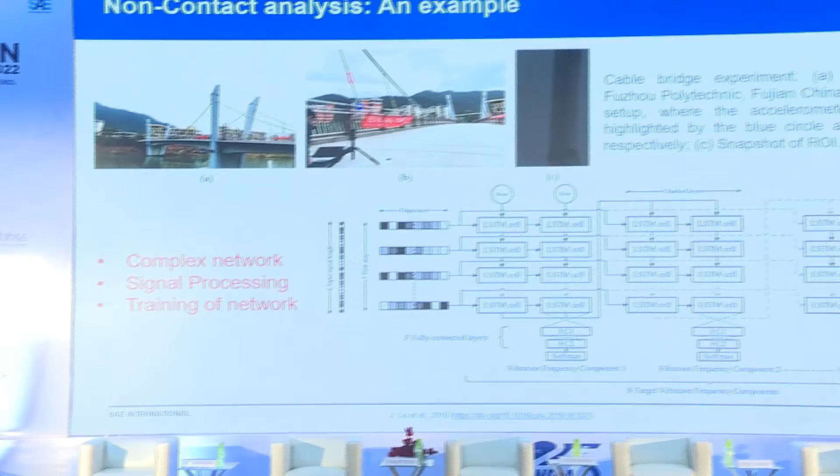They got the vibrations of the bridge, from the cable of the bridge. They got the results from the cameras only; a camera and a simple neural network they used to get the vibrations, the frequencies of the various frequency modes of the bridge. So what I am presenting in my workflow,

what I want is, if we can get the vibrations without using a microphone, why can't we get what people are speaking around the corner? Suppose there is no microphone, only we have the video available. If we are capturing some membrane, the vibrations in the membrane can give us an idea of what people are talking about around, without using any microphone in the area.

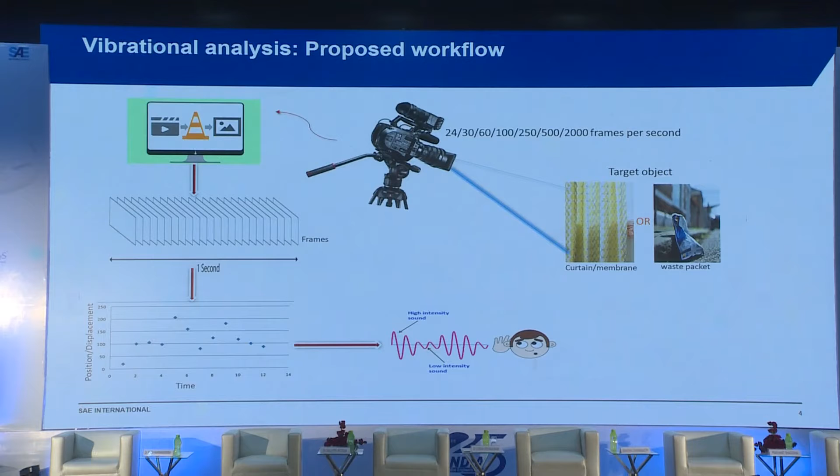So we will use a video. The proposed workflow says: from the video we will take the frames, then from the frames we will detect an object moving throughout the frames. Suppose we have collected around 4,000 or 5,000 frames from a video, and we are getting where the object was in every frame, and what the frequency was saying. From the object movement, we will read where the object is throughout the frames.

So I have used the Harris corner detection technique. This is a very basic computer vision technique. Simply, the input will be a video, and then we will extract the frames from the video. Then we will recognize the feature. The feature we recognize can be a corner, it can be an edge.

From that we will get a graph. It can be a displacement graph, it can be a velocity graph of the object throughout the video. Then we will perform the FFT to get the various modes of frequency of the object. Then we can get the frequency as an output. Here we are not using any costly laser vibrometer or any eddy current sensors.

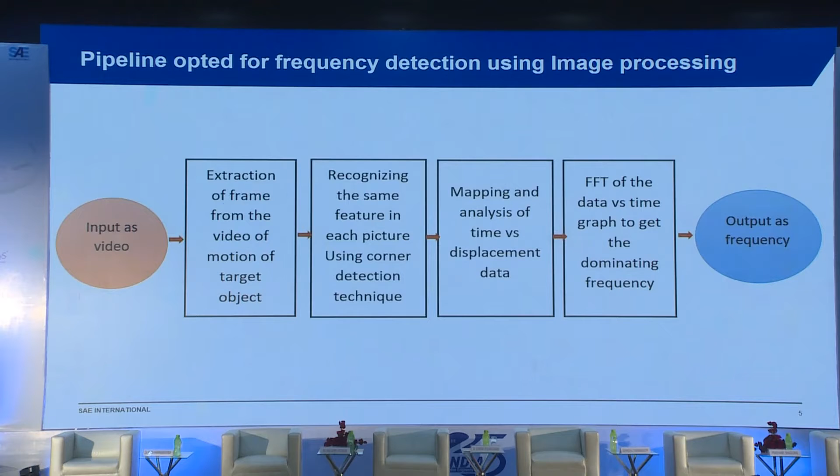So this is the experiment. I can show you here. There is a simple cantilever beam, and the frames are divided in this. So what is the natural frequency of the cantilever beam? It is 8.777. That's from the computer vision technique, and I have made the comparison of this.

This is the cantilever beam, which is fixed at one end and free at the other end. The movement of the free end has been captured throughout the video. You can see 1, 2, 3, 4 points. These are the captured points. Where was the object throughout the frames? Some of the frames I have shown here, and this is the FFT performed on that data.

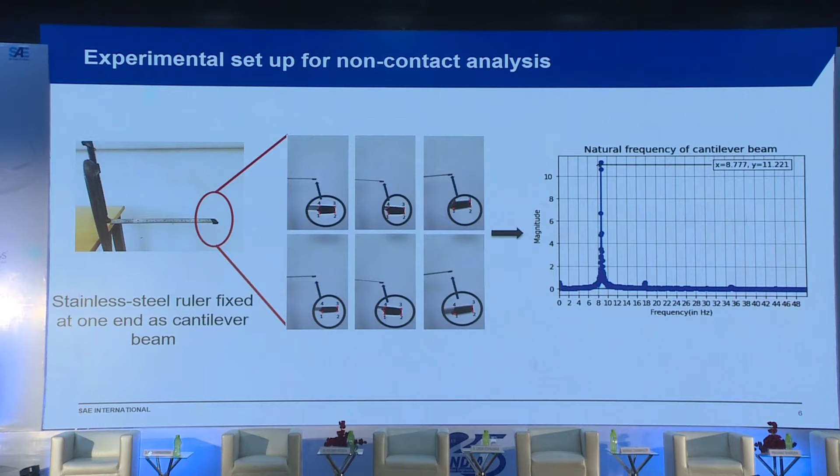Simply, what I did here is data mapping with the tape, pixel mapping, because we want the distance as an output. So displacement throughout the frames with respect to time; I have converted the pixels into displacements. Then the FFT has been performed on that data.

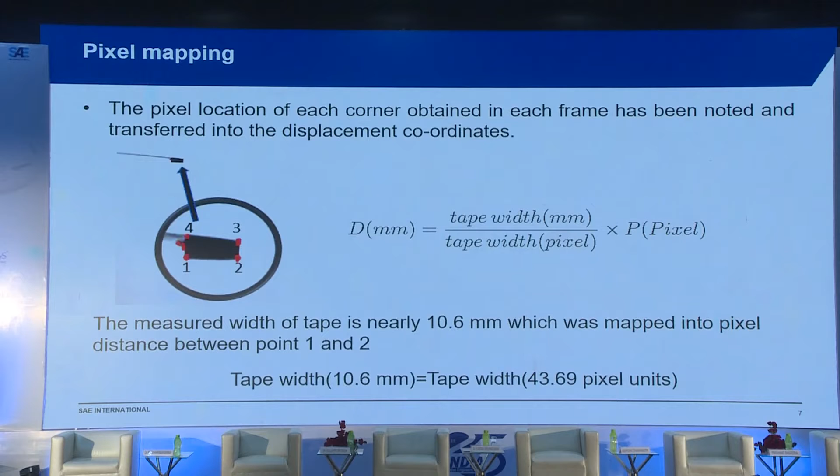So I will show you here, 10.6 mm. There is a simple tape available in the market. That simple tape was pasted at the corners, and the tape was 10.6 mm, and the tape width in pixel units was 43.69 pixel units. Then it was converted into mm. Then I got the displacement and time data.

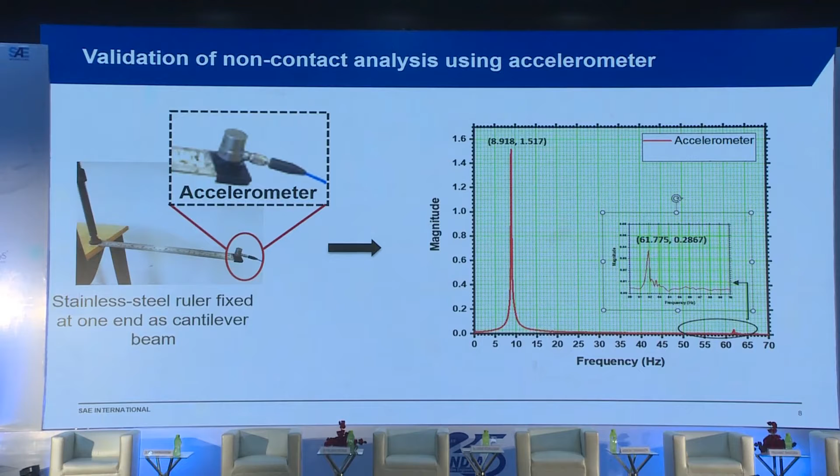Then the accelerometer. This is our conventional method to get the frequency of an object. The frequency observed using the accelerometer was 8.918, which is very close to the 8.77. So our experiment says that using the computer vision method we can get the vibrational frequency of an object, and this method has 98.4% accuracy.

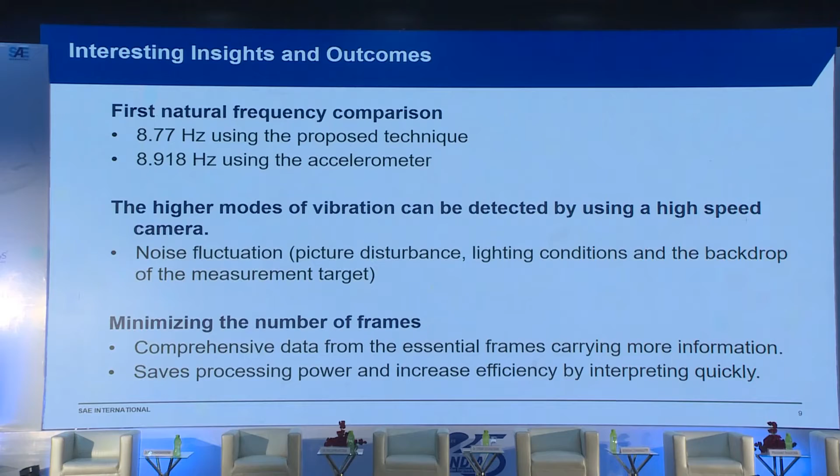What I observed is the first natural frequency using the proposed computer vision technique, 8.77, and 8.918 using the accelerometer. I got these results using only a mobile camera, a simple Samsung Galaxy mobile camera. As I told, there are infinite frequencies in a continuous object, so higher modes of vibration can be observed using a high speed camera.

If we use a high speed camera, we can get more than 2000 frames in a second. There are cameras where 20,000 frames can be extracted from a video in a second. As we are capturing the video using the mobile camera, there are various noises, and various problems like light intensity.

But using a high speed camera, if we are using a DC light, there will not be any fluctuation through the object in the video at the ROI. ROI means region of interest, where we are focusing the camera, where we want to get the frequency.

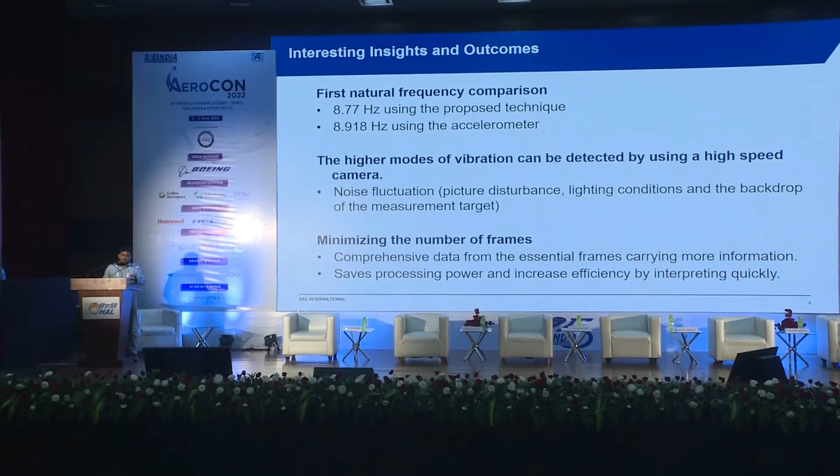So what is another insight I get? Like, comprehensive data: I got 5,000 frames in a second. Suppose there are 5,000 frames; I am not reducing the time, the time will be the same. So if I am reducing the number of frames, if I am taking every 10th or 20th frame, the amount of data can be reduced, and we can get the frequency in 2 to 3 seconds. We can get the frequency of a moving object.

And it saves power, and the efficiency means it can interpret quickly. Sorry.

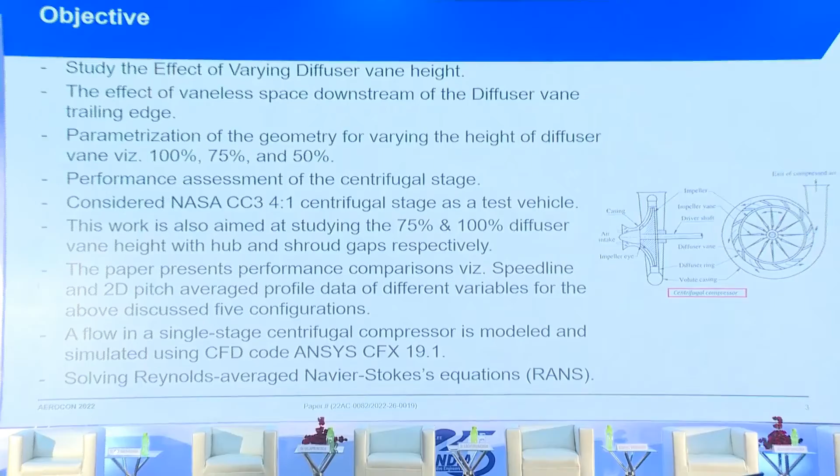So the objective of this study, in some points: first, we need to validate our CFD prediction with respect to the test data available in open source for the NASA CC3 impeller diffuser centrifugal stage. Second, once our prediction is validated with the test data, we performed some geometry changes, known as LSDV, low solidity diffuser vane, basically by changing the diffuser vane height to 50%, 75%, and 100% for the baseline case.

Then we performed a study by providing a gap between the end wall and the vanes: if there is a shroud gap, between the shroud and the vane, and if there is a hub gap, between the hub and the vane. So these four aims we have studied here.

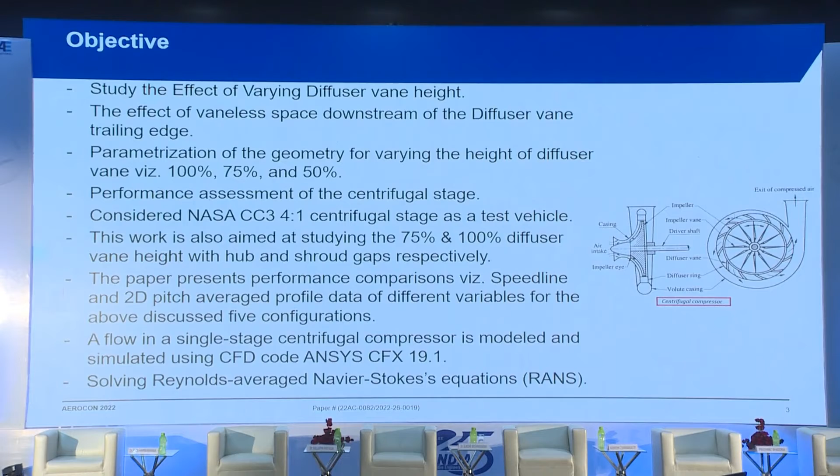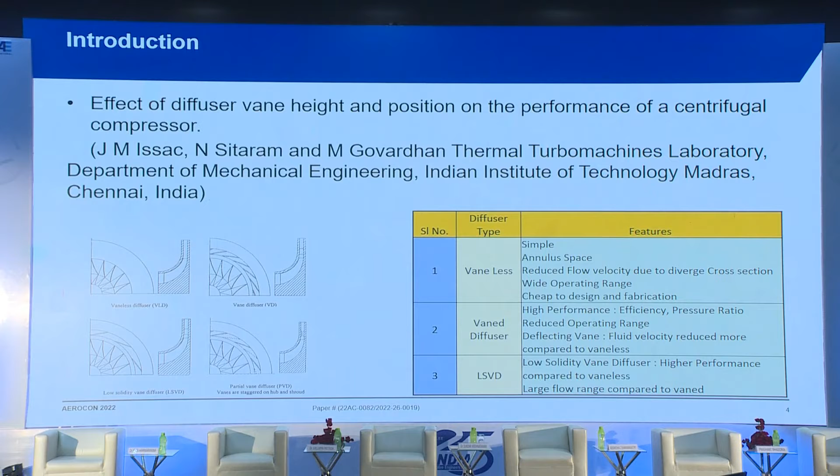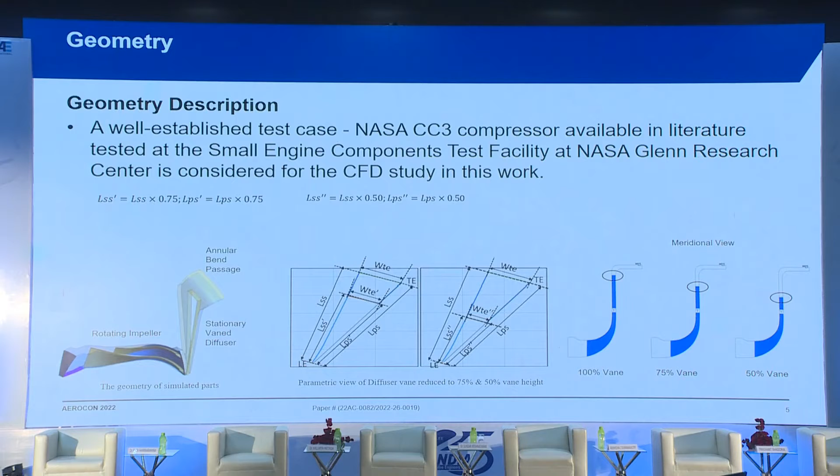So you can see the leading edge, trailing edge, wedge-shaped. Especially I will tell you that this is the wedge-shaped diffuser vane, not the airfoil vane. So the wedge-shaped diffuser vane we have used in this study. You can see in the right corner how we have changed the diffuser vane height. The baseline is 100%, then 75%, then 50%. That meridional view you can see easily.

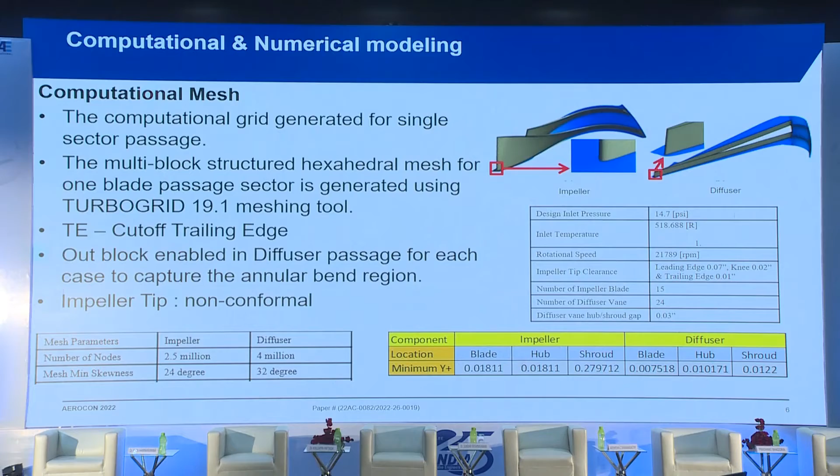The view of the mesh, you can see this is a fully hexahedral case, and the first cell height, as per our CFD standard, our Y plus values are also as per our CFD standard. For different end walls, like impeller blade, hub, shroud, we have tabulated how many component nodes we have used for this CFD study.

So you can easily see the 2.5 million for the impeller and the 4 million for the diffuser. It's 2 million for the diffuser vane, but there is an annular passage outside of the diffuser, which is a full passage up to, we can say, the combustion chamber, with another 2 million of mesh, so that is the 4 million. So right now it is 4 million.

And for the impeller tip clearance methodology, we have used a non-conformal mesh tip. And the O-block we have enabled in the diffuser passage to catch the flow in the bend annular section.

So I think I have missed something. Yeah, here is the operating range. You can see the design inlet pressure, it's already available in the open sources. So we have used this sea level condition for our prediction, that is inlet pressure, inlet temperature, rotational speed.

For the rotating component, impeller tip clearance, we have not used a nominal tip clearance, which is constant from leading edge to trailing edge. We have used a variable tip clearance, which is different at the leading edge, different at mid span, and at the trailing edge side.

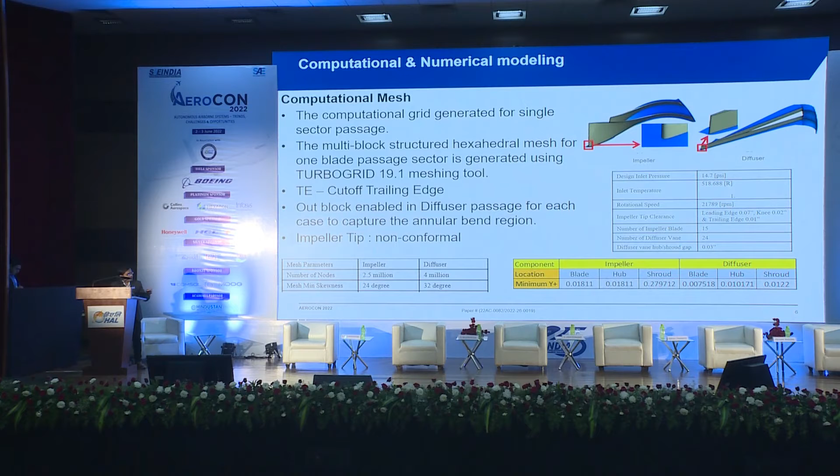So the number of passages for each component is already available here, and the diffuser hub gap and shroud gap we have introduced as 0.03, which was not available. So for this hub gap and shroud gap study, we have used this gap.

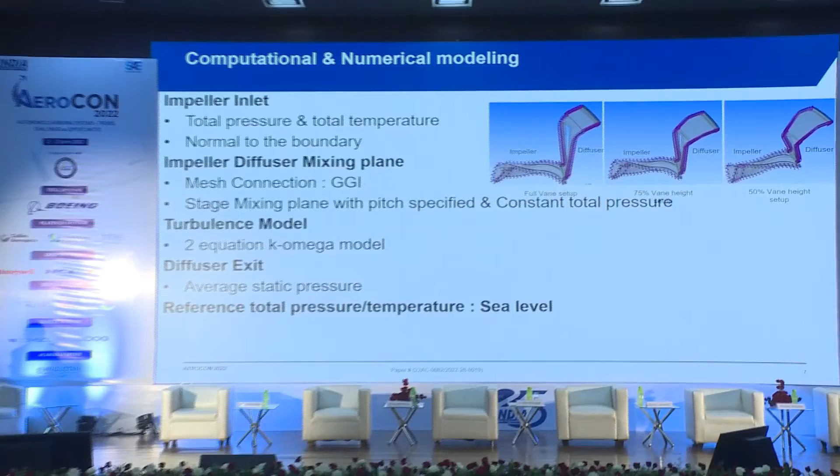So now come to the CFX modeling. We have used ANSYS CFX 19.1 to prepare our CFD model. So you can see the baseline and the diffuser with 75% and 50%. We have used total pressure, total temperature as the inlet condition, and the flow direction is normal to the boundary. Then the mesh connection at the diffuser mixing plane.

This mixing plane is very important in this study because the flow is coming out from the rotating component and going inside the diffuser, the stationary component. To match that flow, we have used a stage mixing plane average scheme available in the CFX model. It averages the flow or flux on the side of the interface towards the rotating component, and that averaged flux goes inside the diffuser vane, or the stationary domain.

The turbulence model is also one of the main concerns. What turbulence model can we use for our CFD prediction? We have used two-equation models, based on K omega and K epsilon. The impeller has different characteristics because it is rotating, and the diffuser is different because it is a stationary domain. So two-equation models like SST, shear stress transport, or the baseline turbulence model we have used to capture boundary layer separation.

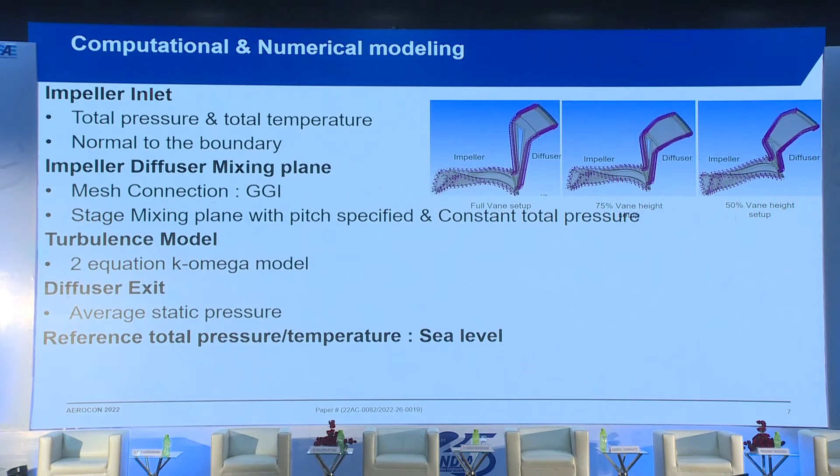And for the diffuser exit pressure we have used the average static pressure. And our reference total pressure and total temperature are at sea level only.

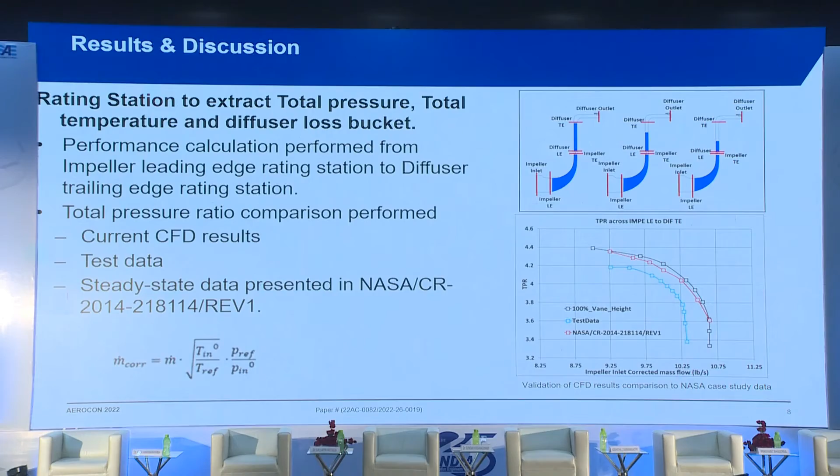With this confidence, we went ahead and predicted our CFD performance curve, the performance characteristics for the diffuser for the LSDV, basically the impeller diffuser stage: baseline, then 50%, 75%. So our CFD modeling is showing us that yes, the total pressure ratio for the 75% vane height is higher compared to the 100% vane height diffuser vane.

Usually the aero designer looks at the compressor: if it is giving us higher pressure ratio with low temperature, based on that we will get higher efficiency. So with the same mass flow rate, if we get a higher pressure ratio, that compressor is acceptable as per the industry. Compressor performance is also directly related to specific fuel consumption. If compressor efficiency is higher by 1%, then SFC is going to reduce by 1%.

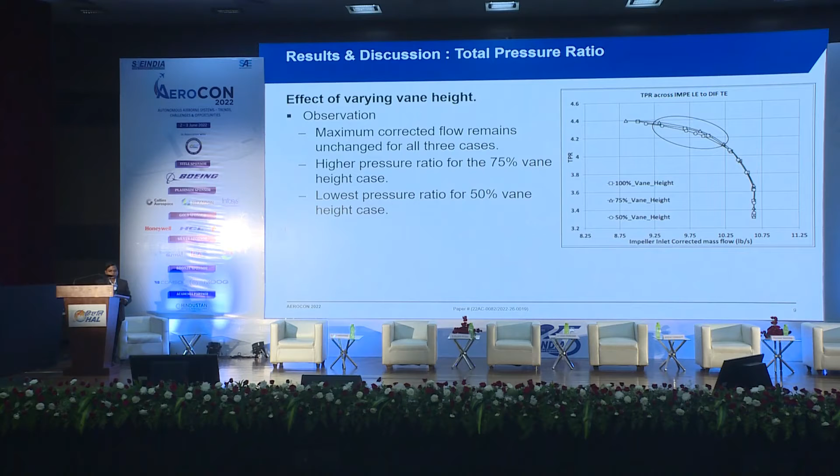So the aero designers are mostly interested in the high pressure ratio compressor, which will provide high efficiency to get reduced specific fuel consumption. Here you can see the total pressure ratio, and next is the efficiency. The efficiency for the 75% vane height is much higher compared to the baseline and 50%. How it can happen, that also we studied. It might be a separation loss, a pressure loss in the diffuser vane, or a shock loss.

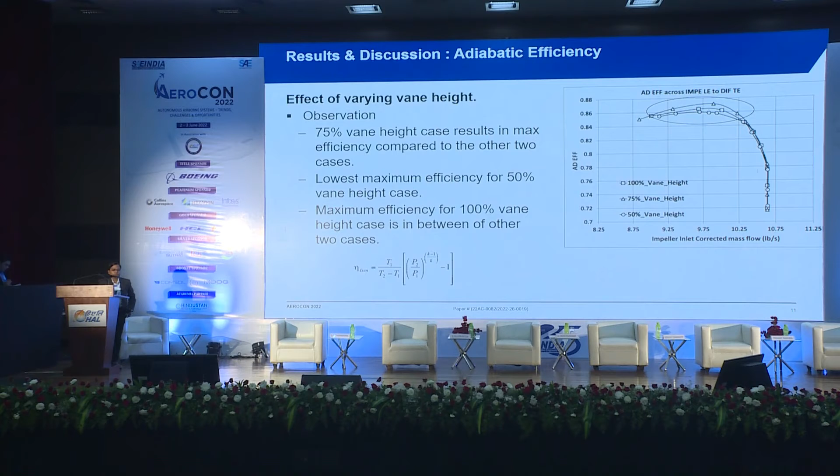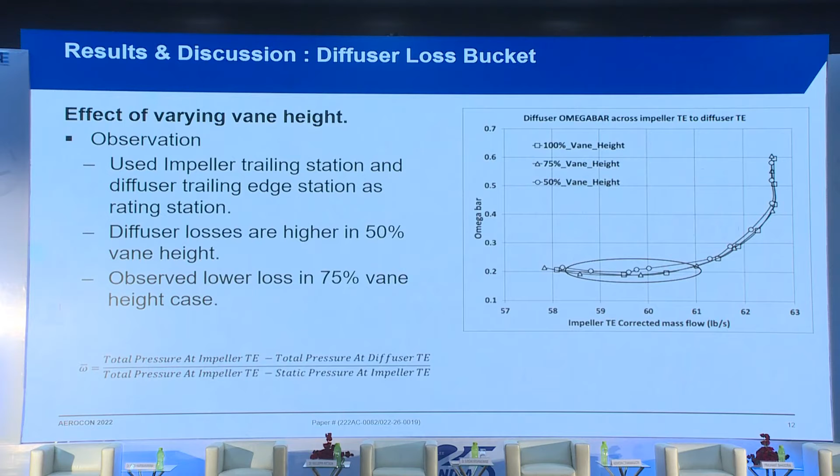You can also see the operating range: the stall point towards the left side, a lower mass flow rate, we have gained compared to the baseline and 50% simulation. Here you can also see the diffuser loss, basically why we have received higher efficiency in the 75%. We are getting lower loss in the 75% vane because of separation, which we have shown in the next slide. So lower loss we have predicted for this 75%, and that's why it is showing higher efficiency.

Now come to the flow characteristics, the flow field. We took the max efficiency point in each case, baseline, 50% and 75%, basically at a constant mass flow rate, and introduced span-wise calculation. Span-wise turbo surfaces means planes at 10%, 50% and 90%. 10% span is near the hub, 50% is mid span, and 90% near the shroud. You can see the total pressure in the 100% and the 75% vane height.

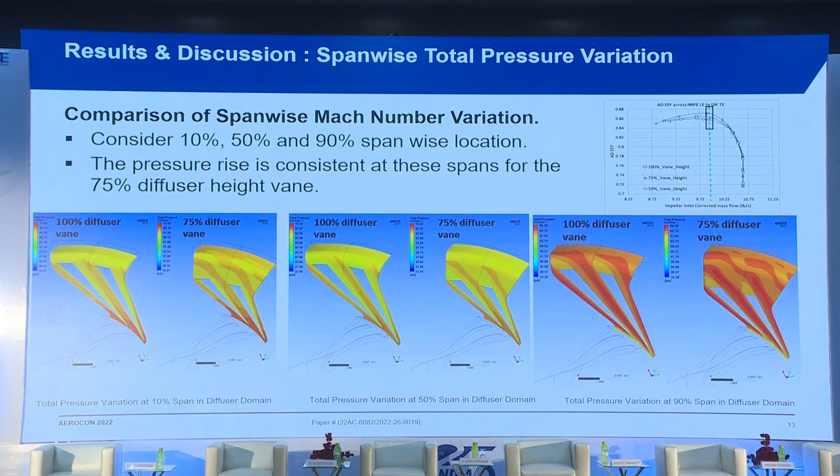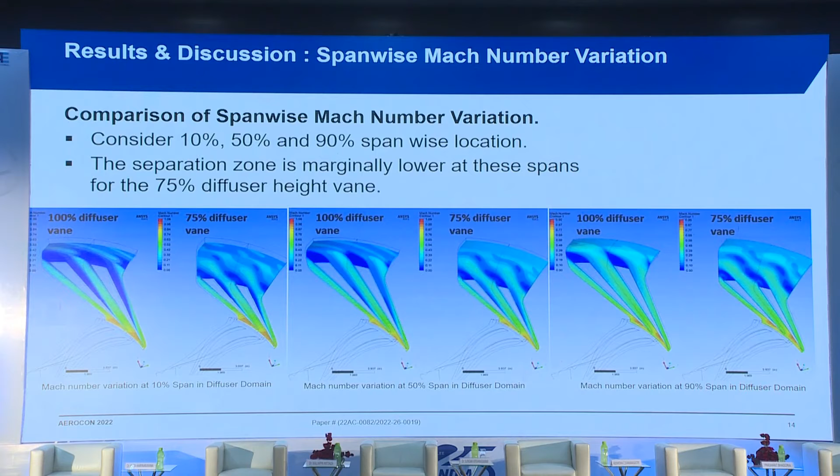The total pressure on the left side at 10% span, 50% span and 90% span is varying, and higher total pressure we are getting for the 75%. Here is the Mach number. Where we get a lower Mach number, there is low velocity, meaning flow separation and separation loss. The case with a higher separation zone has low efficiency. At 10%, 50%, 90% span, our 75% diffuser vane provides a low separation zone, so our flow is more aligned and streamlined compared to the others.

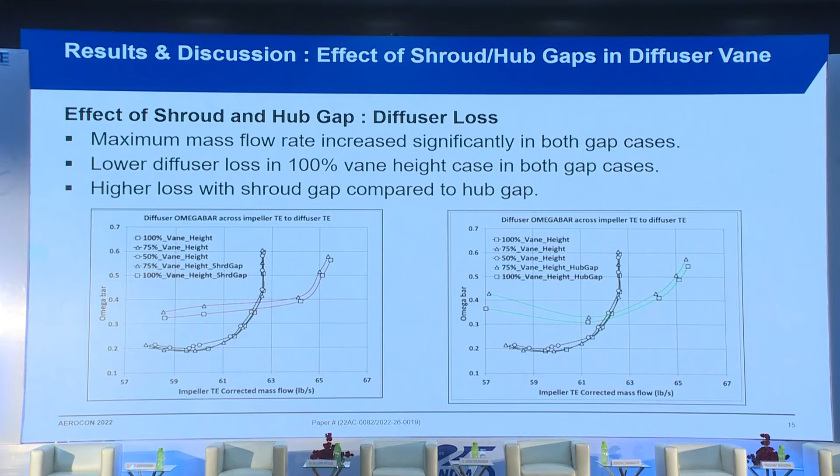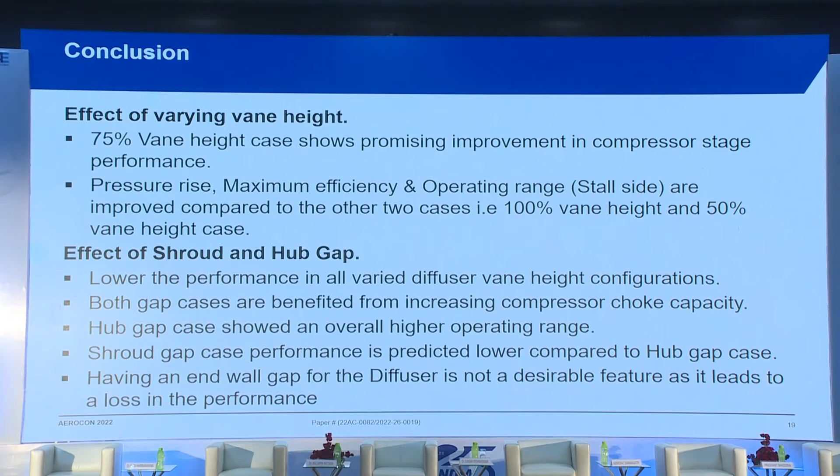Thank you, Sailesh. Do we have any question? Anything?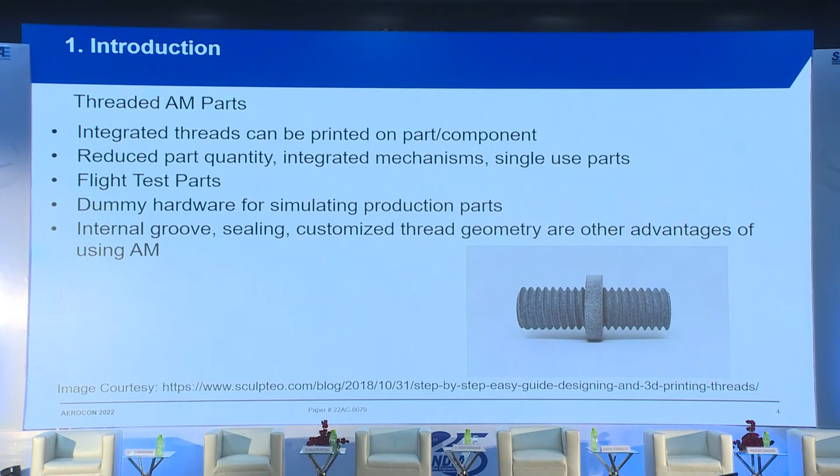Integrated threads can be printed along with the part, because conventionally we make the fastener first, then go for thread rolling as a separate operation. This gives reduced part quantity, integrated mechanisms, including cases where we need single-use parts, where 3D printing becomes handy. Flight test parts, dummy hardware for simulating production parts, prototyping or proof of concept, or MVP as we call it, minimum viable product - in such scenarios 3D printing is very handy. Internal grooves, sealing, customized thread geometry are other advantages of using AM, since we need not go for a secondary operation of thread rolling or machining. We can realize these things at one time using 3D printing.

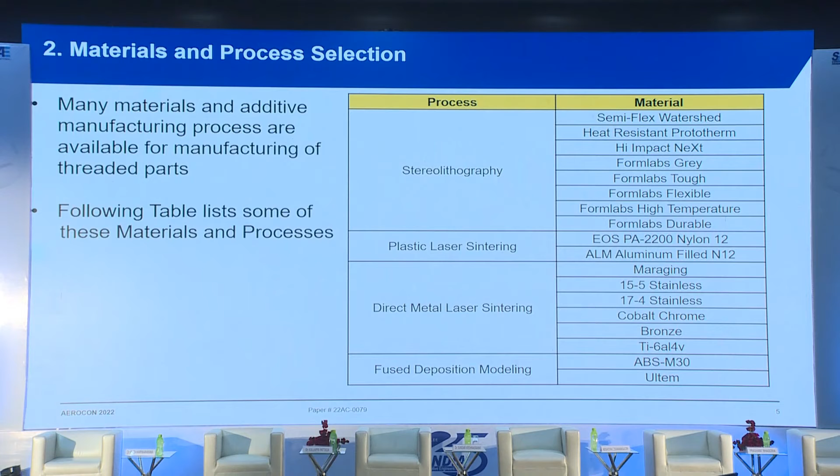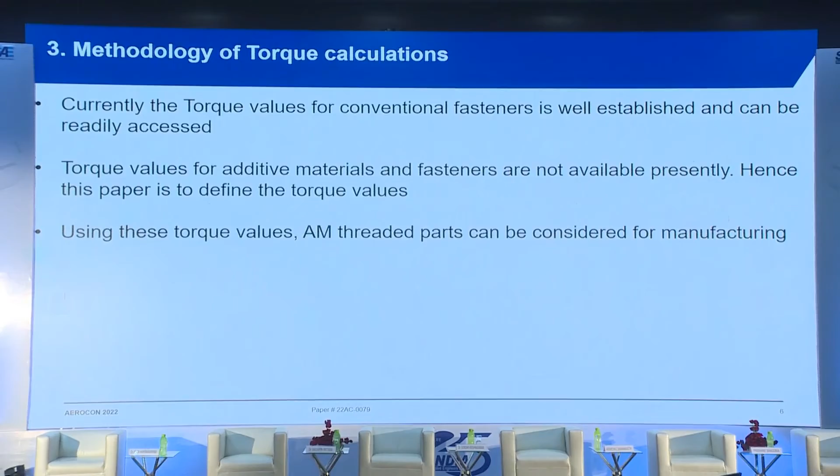Just to set the context as to why we stumbled upon this opportunity for exploring torque calculations for AM parts: as Dr. Kishora mentioned, there was a patented part which was printed and available to us, but I did not find any application of it on flight test. When I inquired with our airplane leads, they said we cannot fix it onto the aircraft for flight testing simply because we don't have a torque calculation available for it, or a preset torque value for AM threads. So we cannot justify fixing it onto the airplane.

At that time, I realized this is a crucial area we have to focus on and build upon, so that for threaded parts of AM we can establish torque values, similar to how we have quite an exhaustive list of torque calculations for conventional fasteners.

Coming to the methodology of torque calculations, for conventional fasteners we have quite an exhaustive way of describing it. In this paper, we tried to use the same approach of calculating torque, the formula basically, but using the allowables available for AM. Since we don't have certain factors like thread coefficient, we assumed present values for the actual material and used the same in the calculation. Going forward, with experimental validation, we should be able to derive those coefficient factors as well.

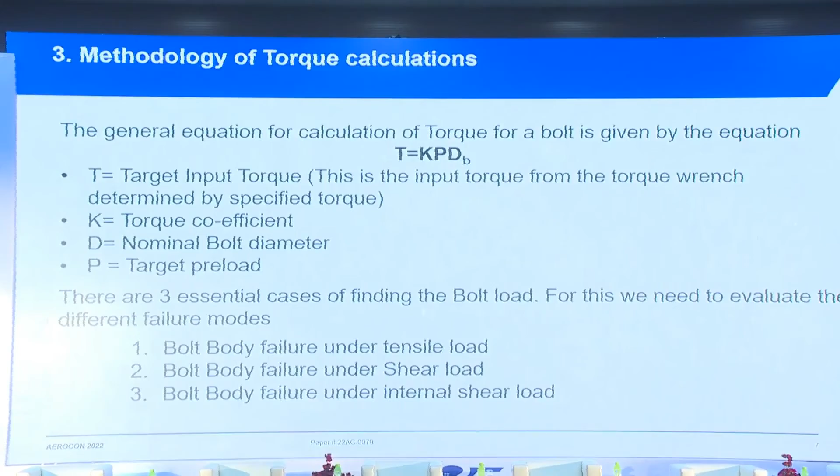This is a very simple, well-established torque calculation methodology. Target input torque is what we want to apply as a pre-torque load onto the clamp or fastener. We have torque coefficient K, nominal bolt diameter Db, and target preload.

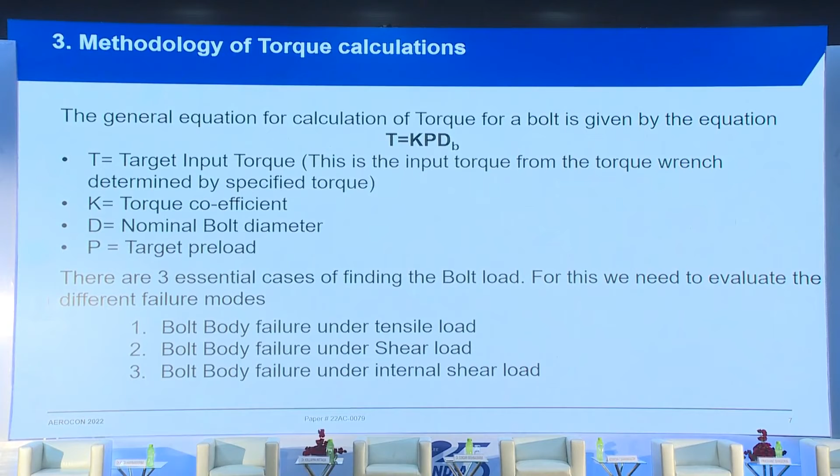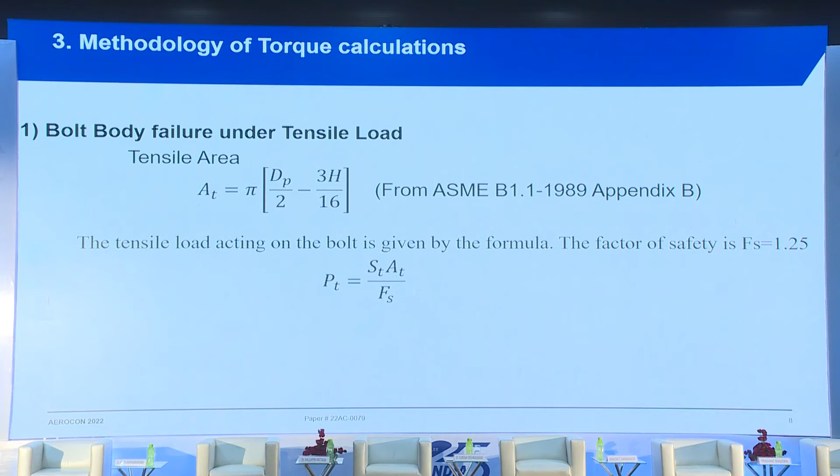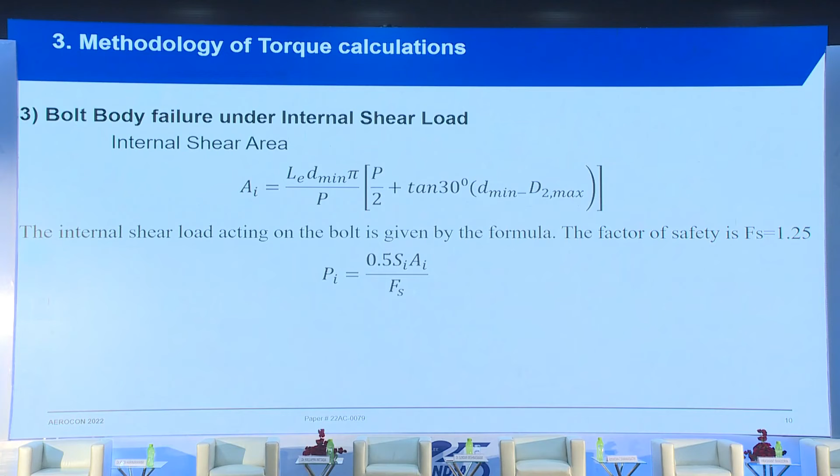This is basically done considering three different types of bolt body failure: tensile load, shear load, and internal thread shear load. These are all from the ASME standard, a regular formula which we've used, so I won't delve into it much. For example, the tensile load for the first condition is obtained by this formula, giving a pre-torque load value. We do the same for shear load and internal shear load, finding all three cases. The minimum of the three is the worst case scenario, which we take into consideration for finally calculating the torque values.

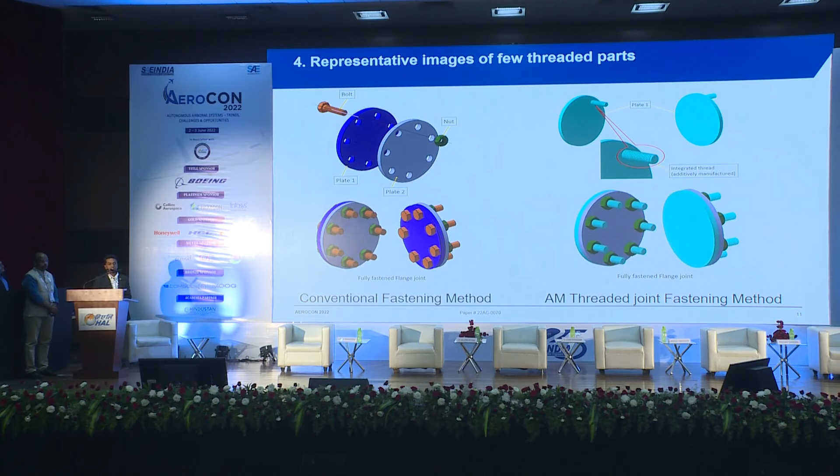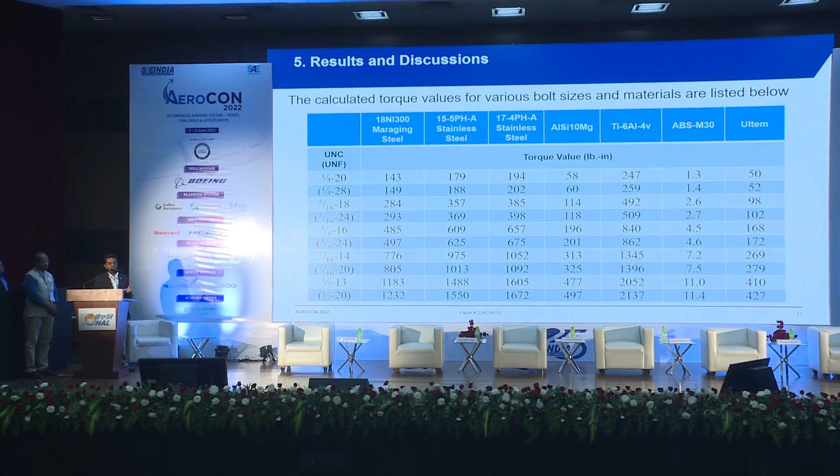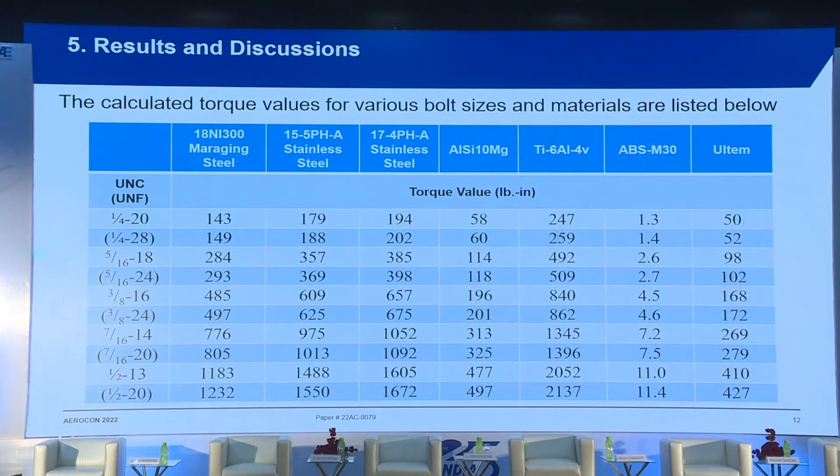Coming to the torque values calculated with the previous formula, we used the allowables for various AM materials like 18Ni 300 maraging steel, stainless steels, AlSi10Mg the most popular aluminium available now, Ti6Al4V on the titanium side, plus ABS and Ultem. We calculated for various standard thread sizes, but we don't want to limit it to those, because sometimes we may have oversized parts. Like the patent we were discussing, it had not a regular thread but an oversized thread. Using the similar methodology, we'll be able to calculate thread torque values for other thread sizes as well.

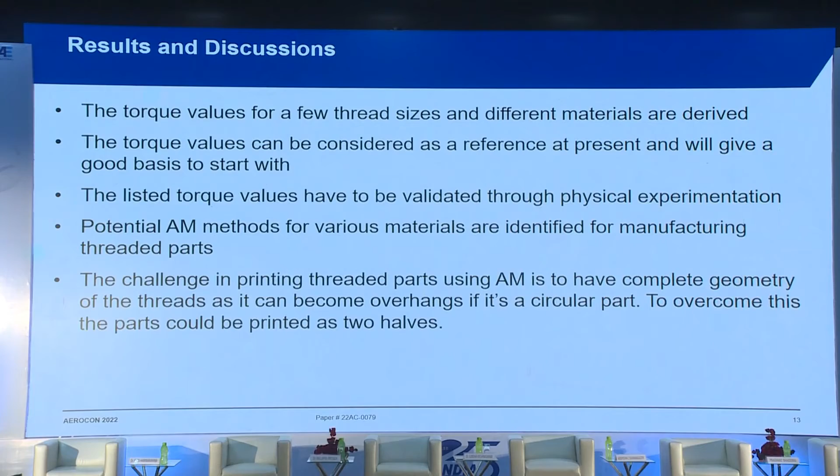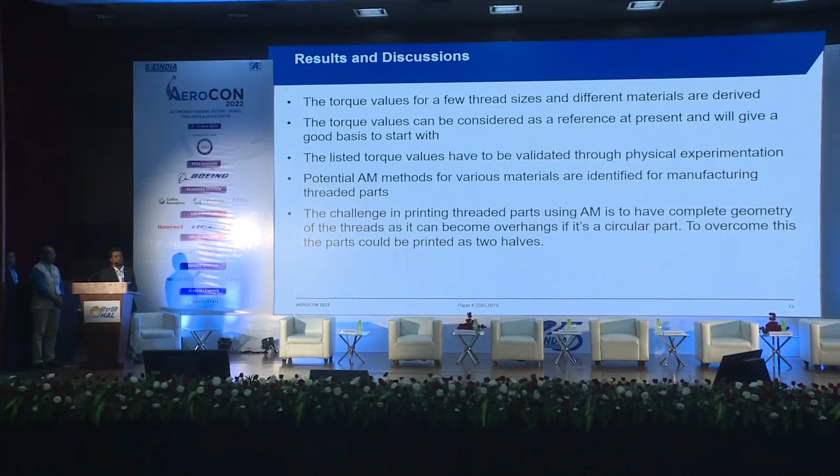Overall, what we have found out is the torque values for various thread sizes with the present methodology, and these torque values can be considered at present as a good base to start with. At present we don't have anything, so this acts as a base for further analysis and evaluation on validation. The listed torque values have to be validated through physical experimentation, which is our immediate future work.

We have also identified potential AM methods for various materials, like Dr. Kishore was mentioning about stereolithography, and we have to fine-tune the processes as well as the machine capability for thread printing. The main challenge in threaded parts is the complex geometry of threads, because thread printing is not accurate from an AM machine.

Currently, we are using post-processing techniques like thread rolling or thread cutting over a base thread which is already printed, making it into a finer thread later. But we have to find ways in which we can print a thread directly to use condition, and that would help us eliminate some of the post-processing required.

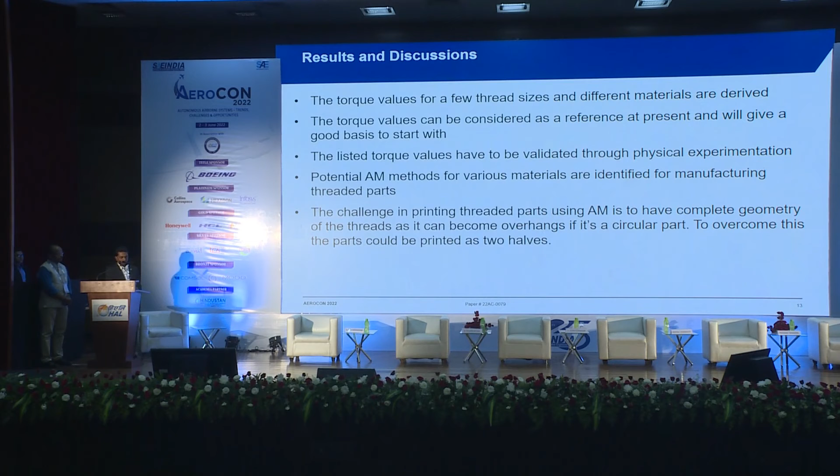Coming to the future scope, as I mentioned, experimental validation is very much necessary. But before that, we have some work going on in another team with extended FEM, a new technique being developed for analysis of AM parts using FEM. They are primarily working on composite technology now, but we want to rope them in for evaluating thread profiles as well, as part of extended FEM. That will give us more understanding of what we have at present and what we can get as a result of the FEM analysis before actually printing the part and doing physical validation.

But after this, we definitely want to go for physical validation, print the parts, and experimentally validate the torque values. A few methods of validating torque values are the movement check and the loosening check: initially the thread is tightened and slightly over-tightened, then during the loosening check, when we loosen the torque, it has to match the previous movement check where it was coinciding. Finally, once we mark these two points, when we tighten it back, it has to coincide exactly for the same torque value.

For all these checks, we will be monitoring the torque using a torque transducer or a torque tightening device, a measuring device. So with these three checks, we will be able to validate all of the threads that we print in a physical environment.

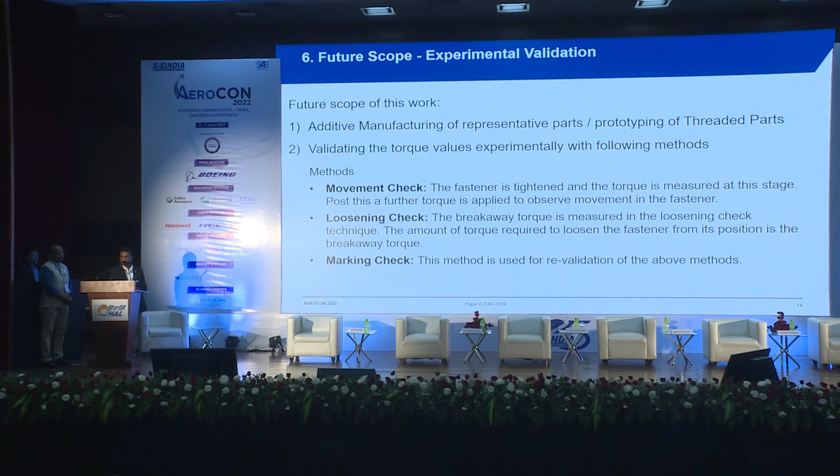With this, I would like to hand it over to Dr. Kishore for the conclusion part. Thank you, Harsha.

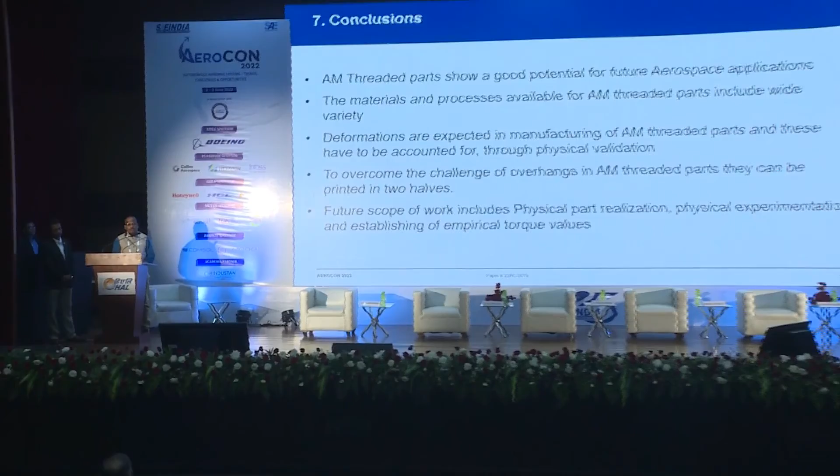As we briefly touched upon, AM threaded parts show good potential for future aerospace application. We made a humble beginning, so we have to progress further. That's the thought process, as Harsha mentioned. Materials and processes are available; to some extent we have allowables, but we have to derive further. Deformations are expected in manufacturing of AM threaded parts, and these have to be accounted for.

This relates to when we do post-processing, whether we have shrinkage or exactly matching the thread profile, and whether we need to do an end thread rolling operation subsequent to 3D printing. That's something we have to explore. So that's what we talked about: physical part validation, realization, and establishing empirical torque values. That's a key immediate next step for us.

We also printed a representative threaded part using PLA material. It came out good. We were a little apprehensive about how exactly the thread printing would happen, because there could be chances of overhanging, but luckily we could realize it in this plastic or polymer 3D printing. So we expect to adopt a similar technology or process for metal 3D printing, and we're hoping for success.